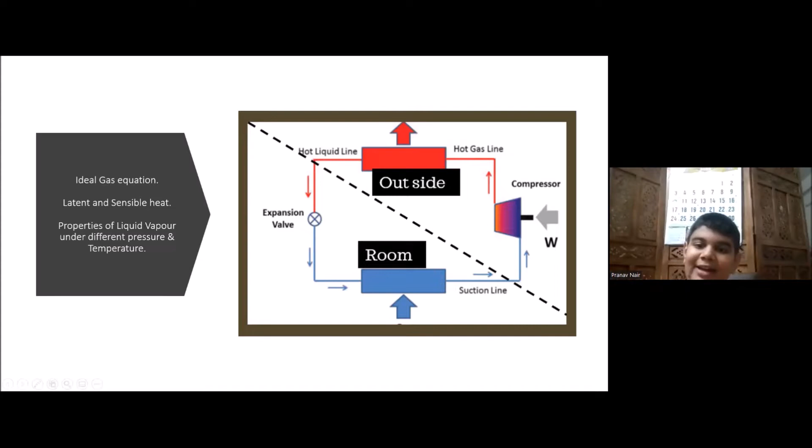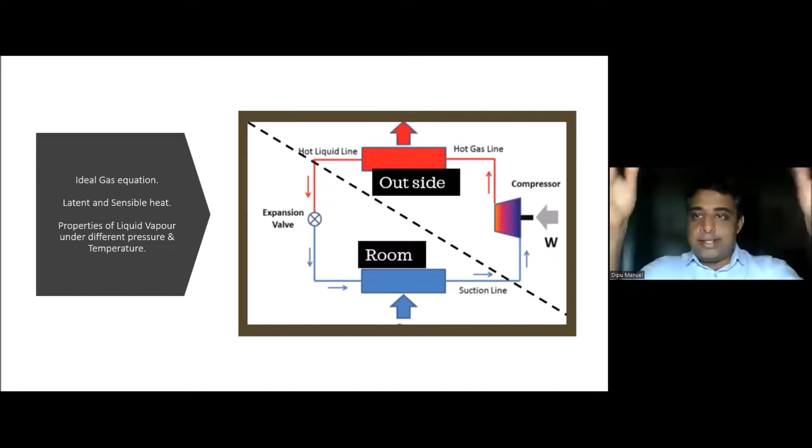That is the basics of air conditioning. So we explained in the last class that it's all about managing the air, managing the properties of air. That includes the humidity, water content, the temperature, and the pressure related to that. That is what we do in air conditioning. So that part is already answered, and we are not getting further into how he developed the air conditioner or the properties of air side.

So that is generally called a psychrometric chart, where the relationship of humidity and temperature of air is shown. That is the basic chart which explains the properties of air at various temperatures and various humidity ranges.

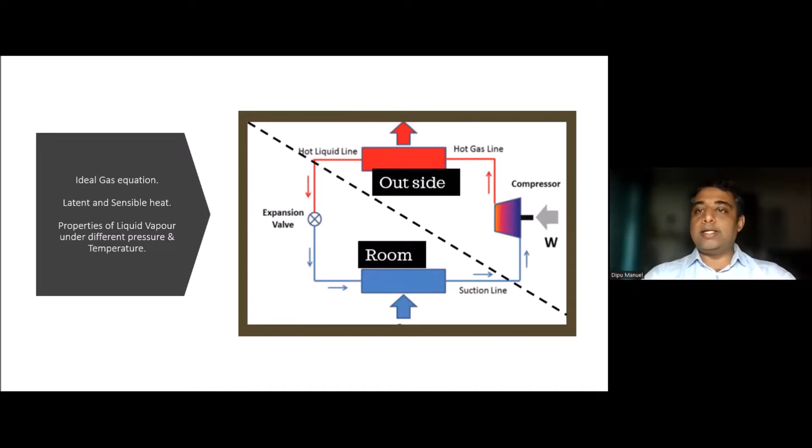So before getting much further, what is the best natural air conditioner? Yes. Sir, I'm not sure, is it fan? No, I'm talking about a natural air conditioner, something occurring naturally, not man made. Wind? Any other guesses, wild guess?

Is it rain? Rain, yeah. If you see Earth as a complete ecosystem, yes, rain is part of managing the temperature in a particular area. That is basically called the water cycle - rain, evaporation from the sea, condensation, that is also there. So that is when you see it in a bigger canvas. Let us bring it within the Earth, not Earth as a whole.

Any guesses? So I'll just come back again.

Air conditioning is about moving or maintaining the properties of air. It is like moving energy from one side to the other to maintain our desired temperature - moving energy from one part to another, one body to another, basically movement of heat energy by various ways.

Is it wind? Yes, wind is part of natural air conditioning. So it is like wind, rain, thunder, lightning - all this comes as a part of it, when you see the complete Earth.

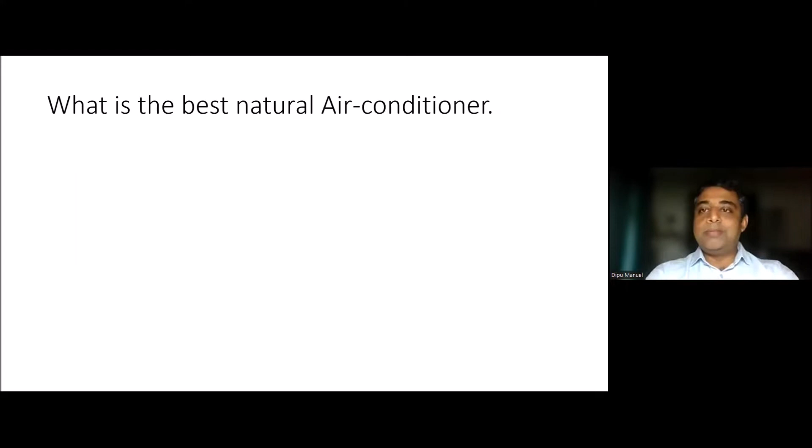Okay, I'll come back. What happens when we feel cold? What happens when we feel warm?

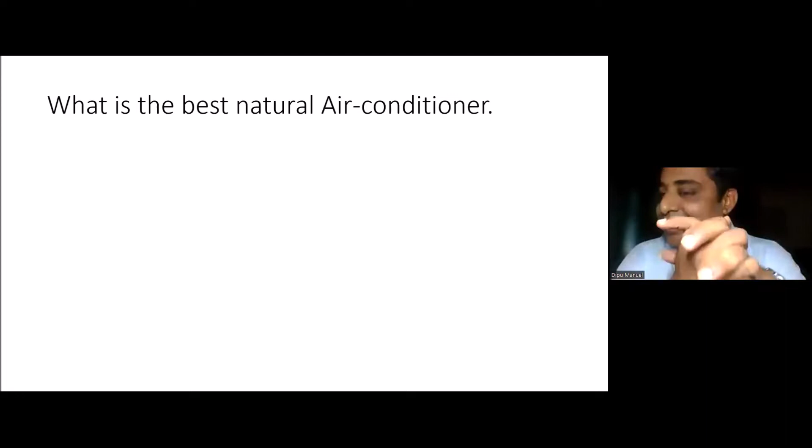Every living organism has a varying body temperature. So the best natural air conditioner is the body - human, or any natural organism. Let us take the example of the human body.

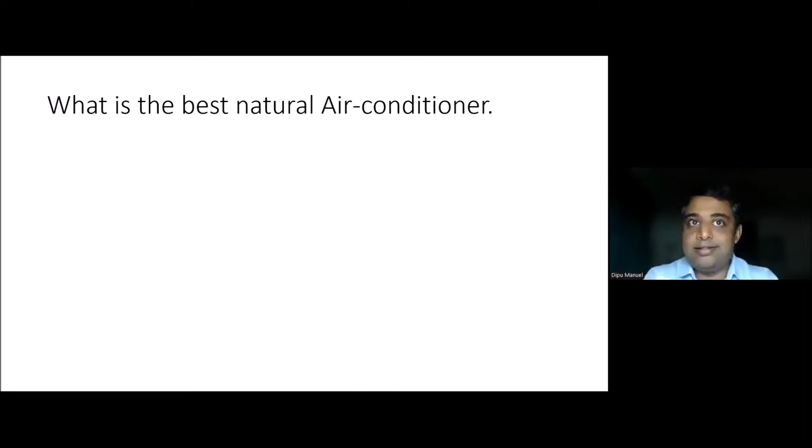When we feel cold, we sit very close. What we are doing is protecting the heat energy generated from our body by reducing our total exposure to the atmosphere, so there is very less space for the heat energy to escape. We cover our body with more clothes.

If you see animals, their fur stands up so there is very less space for the heat energy to escape. When it is summer, we like to move our hands away to let more air move through our body. We sweat.

What happens in sweating? The water comes out through our sweat glands. It uses the temperature on our skin to evaporate. When it evaporates, our body feels cool - that's evaporative cooling.

Last class we discussed about water kept in a pot - that is also called evaporative cooling. When water evaporates, it takes heat energy from the body it is touching. In a mud pot, it touches the pot, so the pot becomes cooler than the ambient condition.

In terms of the human body, it takes heat from our skin, so our skin feels cooler. That is the way we maintain our temperature. So organisms are the best natural air conditioners.

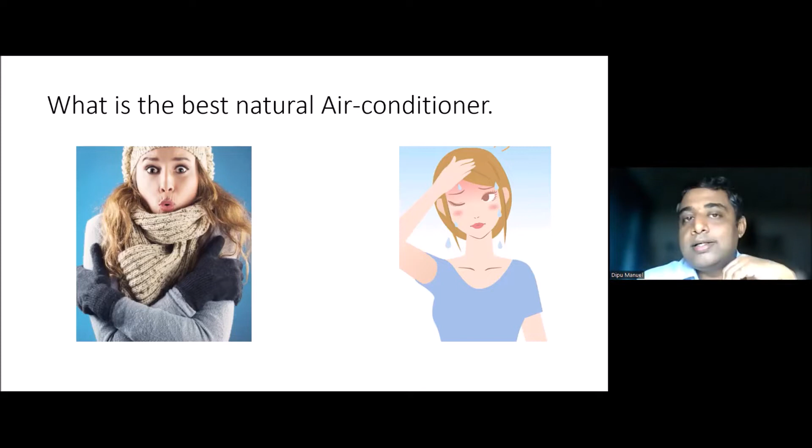Any other thought on this? You can think about anything else. I've seen one video where they told... when you mentioned the mud pot, I remembered terracotta - they use it for air conditioning.

Terracotta, terracotta - like long tubes they make. Yes.

That's all. Until 1902, until Willis H. Carrier's development, humans were using evaporative cooling for air conditioning aspects. So one method is called evaporative cooling.

The second was movement of air. If you look into Persian architecture, or basically in India, the kind of architecture where we have huge towers rising up, like Qutub Minar - this kind of architecture is found in dry climates, which came from Persian architecture, originating somewhere in the Middle East region.

What these towers used to do: the air comes out and creates a tunnel, and the air going out creates less pressure at the top. So more air from the desert comes through the windows, which are small openings. When it passes through with slightly higher pressure than atmospheric pressure, it expands inside the room, so the room feels cooler.

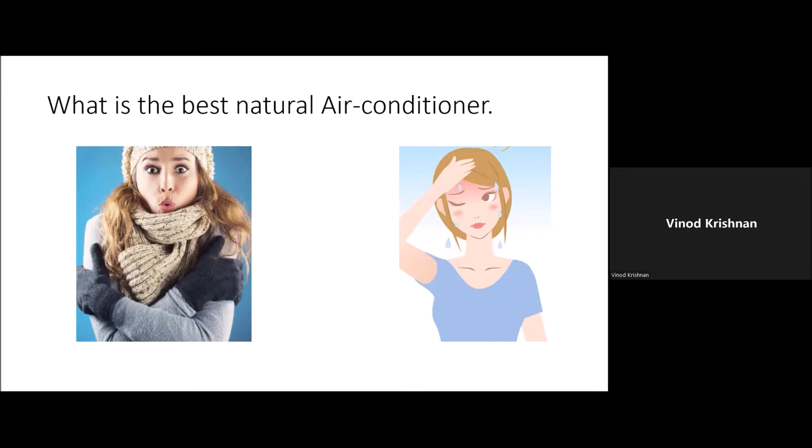No, actually, I'll clarify again. In people like us who are living not in the polar region, normal human beings or animals which are awake for 365 days, our metabolic rate increases in the winter. What I was talking about metabolism going down is only for polar bears or animals which tend to sleep for 6 months, 8 months, the winter they completely sleep away. And in the summer they wake up, because the summer may be -20, winter may be -60, -40 for them. But people who have a plus temperature, living in plus temperature, that means more than 0 degrees Celsius, or summer goes plus more than 20 degrees Celsius...

These kind of people and animals, we eat more in winter, we eat less in summer, we drink more in summer and less in winter. Drink, that is because we are sweating internally. In places like Kerala, actually sweat comes out and you feel drenched. And when humidity is less, like Delhi, people are sweating, but they don't realize it, it gets evaporated very fast.

So metabolism rate for human beings increases in winter. That is one of the reasons we eat more, or we can say our body wants more food. So we feel hungry more, we eat more. That metabolism is used to maintain the body temperature.

I'll tell you one observation. If you visit a zoo in the northern part of India, Delhi or any other places, maybe Rajasthan, Chandigarh, Lucknow, above that region, there is a board which says from November to March, say X kilogram of meat for a tiger, for example, and minus kilogram otherwise. Even for animals, the zookeepers provide more food during winter. And in summer, the food is reduced, but they may be given more water to drink.

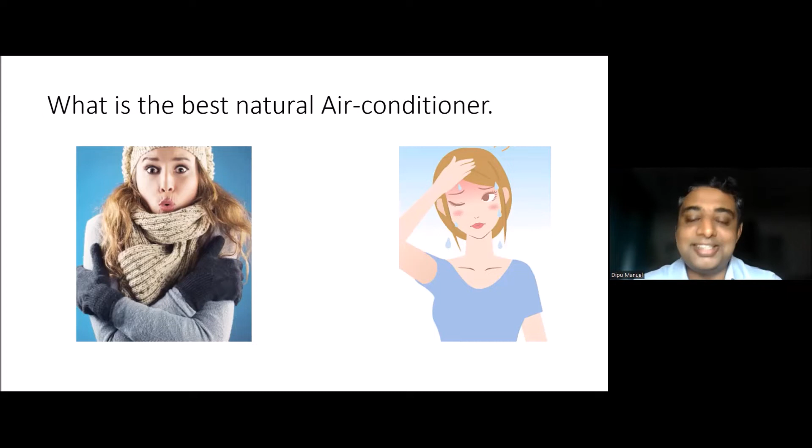Now let's see what are the applications of air conditioning, other than what we normally see. What we understand is air conditioning means movement of energy with external help from one part to another. So what will be the applications of this? Where are they used - types, applications, like in the human body, the naturally occurring air conditioning, and the man-made application or usage of air conditioning. Sir, even in cooling units to keep products at freezing point.

Like frozen meat and all - preservation of food, that will increase the life of a produce. Like an apple, naturally produced by the apple tree - if maintained at normal temperature, it may last a few days. But if you maintain it at a different condition, maybe lower temperature with certain humidity, it can last many more months, so its life can be increased. So apple's life, any naturally produced vegetables, fruits, meat - all this life can be extended, so we can store it when available and use it when required. That is a very good application.

We also use it in condensing milk - that is a way of extending the life of milk, preservation. So from an application point of view, it is preservation of food, or you can say increasing the life of that produce.

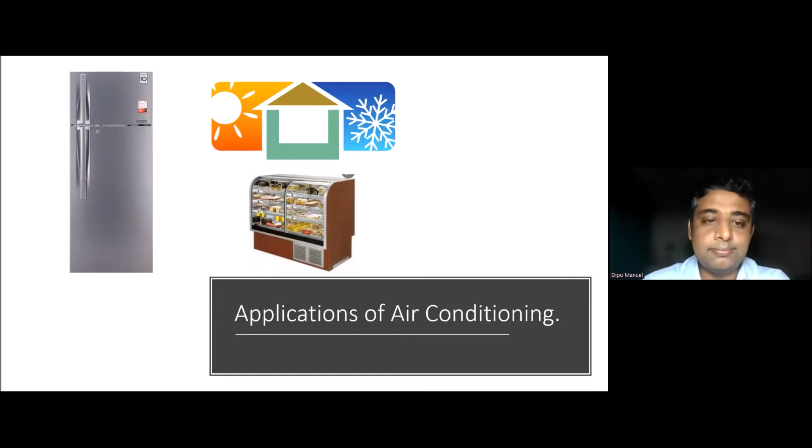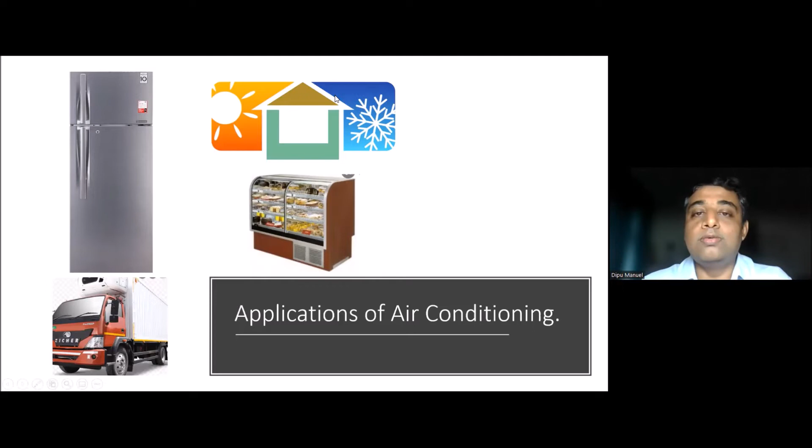The principle remains the same. Let us see the difference between air conditioning in cooling and heating. On the left hand side is what we generally understand as air conditioning, where it cools. We associate refrigerator, ice cream, or low temperature with air conditioning. Let us keep that understanding for the time being.

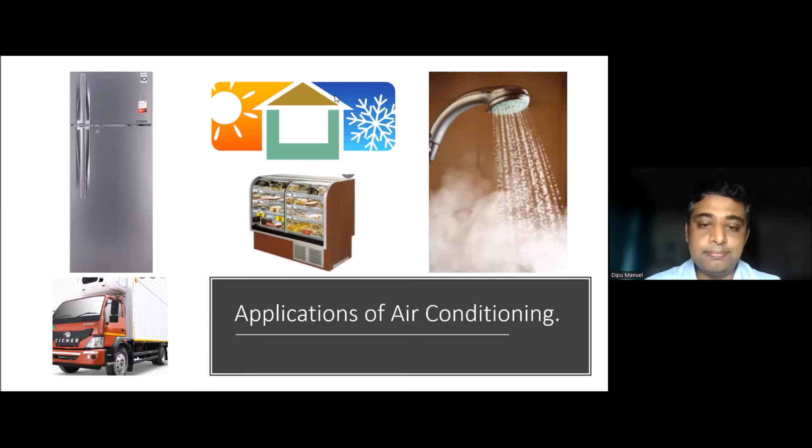So we take heat from an area, reject the heat outside, and use a refrigerant which moves in a closed loop through a motor. It absorbs heat, goes all the way, rejects heat, comes back, and absorbs heat again. If you reverse it, that means if we want to use the heat that is rejected, that becomes a heating application.

Sir, I had seen one video in which they had shown outdoor cooling. Yes, that happens when the inside room is supposed to be heated up.

The refrigeration cycle remains the same. The hot air which is coming from outside, that is what we are taking into the room. So generally the outside and inside get reversed in this case. There is no change in the properties of air or the principles of air conditioning; that remains the same. The usage, whether we are using the cool air or the hot air side, is the only thing that matters. So air conditioning can be used for managing the air.

It can be heating, it can be cooling also. If you further generalize it, air conditioning is managing the temperature of a medium. It can be water, it can be air, it can be any other thing, decreasing the temperature of the water.

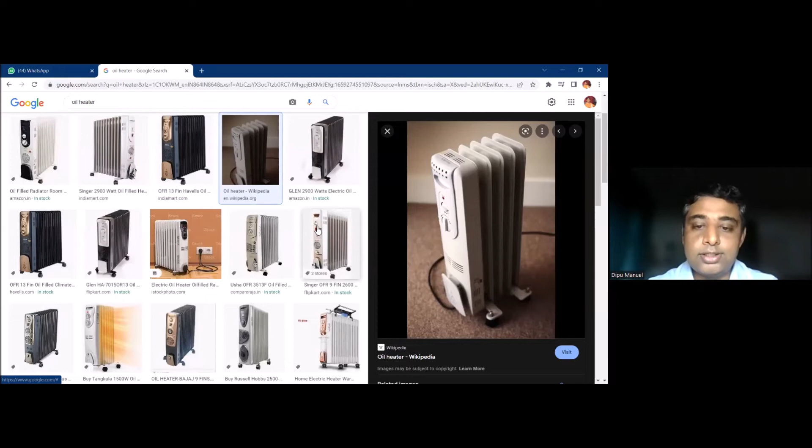So these heaters are generally preferred in rooms. And the third option is air conditioning only, but using the reverse cycle. The condenser and evaporator are interchangeable by way of connecting these pipes through a four-way system. In cooling time, the compressor's hot gas comes here and goes like this, where the room remains cool. In winter season, the gas coming out of the compressor connects to this pipe, passes through here and goes back to the room through this compressor. So this becomes hotter, this becomes cooler. It is called reverse heat pump or reverse cycle in general terms. So the same air conditioning, by moving refrigerant between evaporator and condenser, can be used as a heating application in winter. So generally there are three options normally used for heating applications.

Sir, is there any image of this reverse air conditioning? Like a device that uses reverse air conditioning?

The system looks like air conditioning only. It is the same air conditioner we see in our homes. Only thing, there is no change in looking. The only difference is, in heating, instead of the refrigerant going to this side from the compressor, it goes to this side. So there is a valve which changes the flow of refrigerant, whether it should flow to this side or that side. So it looks the same. Yeah, you can say a four-way valve.

Let me just see the four-way valve. I can explain through images.

Sir, suppose normally the AC will face inside the room. So if we fix the AC outdoor and put a pipe which lets hot air go out inside, then will that do it?

So what happens is, like in cooling, the refrigerant moves in this direction. This is the AC. This is the part of AC which is inside the room, and this is the part which is outside the room. So the refrigerant comes, it absorbs heat from the room, so the room becomes cooler. It comes and the compressor increases the temperature and pressure. It comes out, rejects the heat into the atmosphere, and comes back to absorb more heat. This is the cooling side aspect of it.

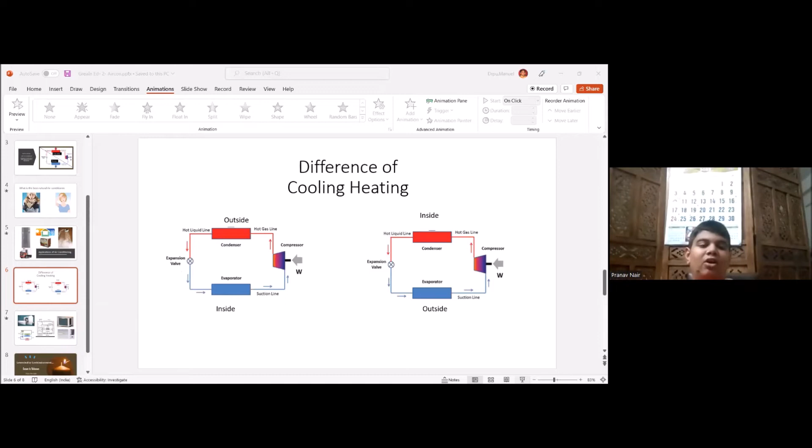In terms of heating, this arrangement turns the other way. This remains here itself because the AC is already installed. The refrigerant rotates in the reverse way. From the compressor, it comes here. Whatever comes out of the compressor is high temperature, high pressure. When it comes into this side, which is inside the room, it rejects that extra heat into the room, so the room becomes hotter. Then it goes back, and when it comes to ambient condition, it tries to absorb heat from the ambient, or become cooler. The refrigerant becomes further cooler here because ambient is cooler at that time. So our outside unit will throw cooler air outside. Then this comes back, so the refrigerant reverses the rotation. So it is called the reverse cycle for heating.

Same air conditioning, same system. Only the flow of refrigerant changes. I hope I made it clear. It will be continuing in either way, and this becomes a heater. And that heat energy we can use for process generation, for hotel applications, hot water for cooking aspects, or hot air.

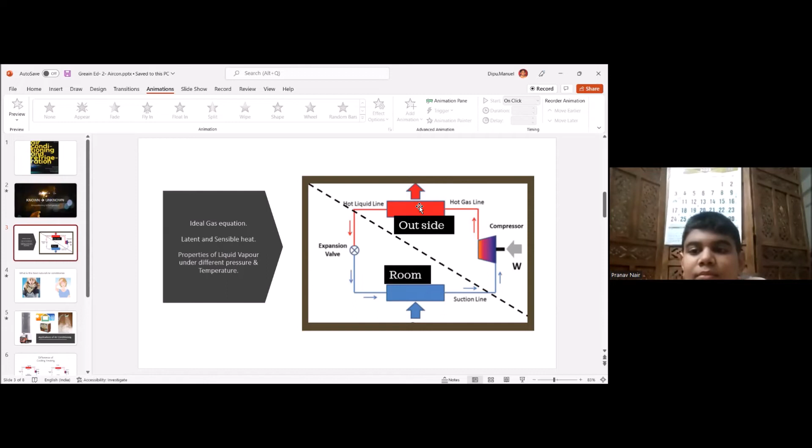Is this kind of heat pump? The reverse cycle air conditioning is called a heat pump. A heat pump is generally 3 times more efficient than direct electric based heating. Like if we use electric heating to heat water from 0 to 100 degrees Celsius, and if we use a compressor based heat pump to heat the same water, it consumes only 1/3 of the energy.

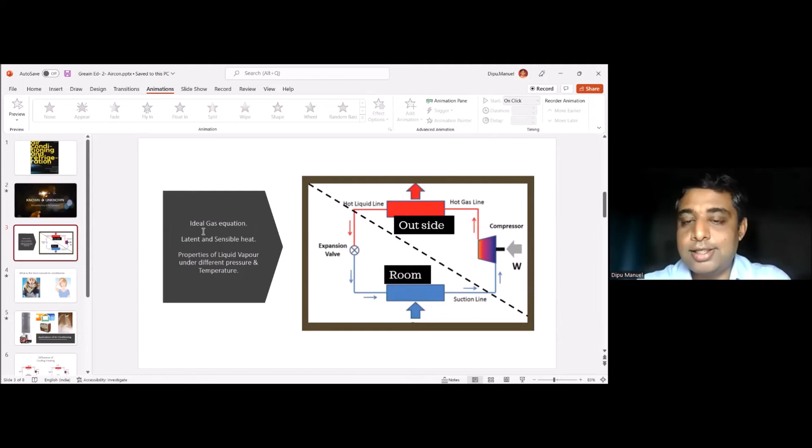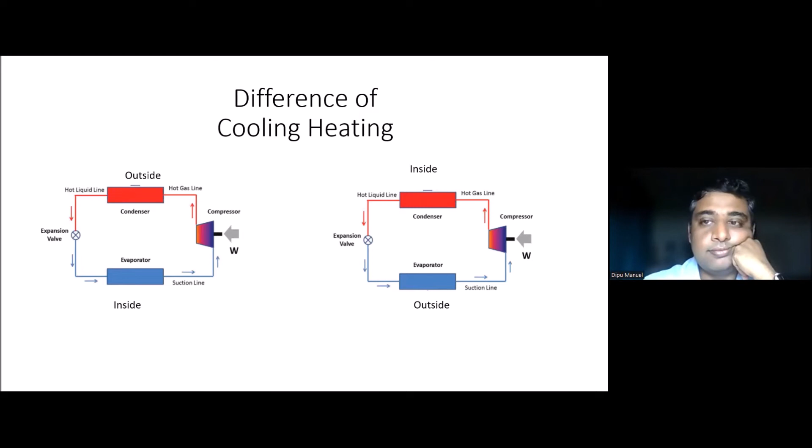So these heat pumps are mainly used in hotel applications because a bigger installation basis is there. Hot water is required mostly in factories where hot water, hot air, all these are required, so heat pumps are used. A boiler, in the normal way, directly burns petrol, diesel, or wood to generate steam from natural resources which are cheap and easily available. But this adds to greenhouse effects and pollution. So if electricity is produced from natural resources like wind or renewable energy, using a heat pump to produce hot water or hot air is much more efficient.

So this is what we call the general understanding of air conditioning. Sadish has already told about the assignment completed on the different types of air conditioning. So I just wonder, what are the different types of air conditioning? Are you asking me? Yes, and others also.

Sir, I actually wrote it on the basis of where it is used. Like in houses, we mainly use wall mounted air conditioners, which are on top. In offices and some international schools, we use centralized air conditioners. And in my school, there is even a ceiling cassette. I also put portable air conditioners, which you can easily shift from one place to another. Then I also mentioned about condensing and cooling tower and centralized air conditioning, that's all I mentioned.

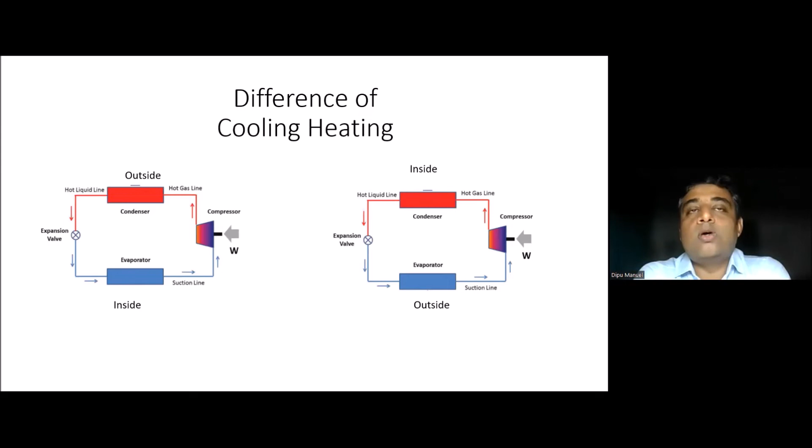So what you have told is correct. It's called window air conditioner, where the complete air conditioning system is enclosed in one box. So in a window air conditioner, this is what we see from outside, this is what we see from inside. The entire air conditioning is in one box. It is called window because it is installed through a window—you create a window in the wall and put the complete system of the air conditioner.

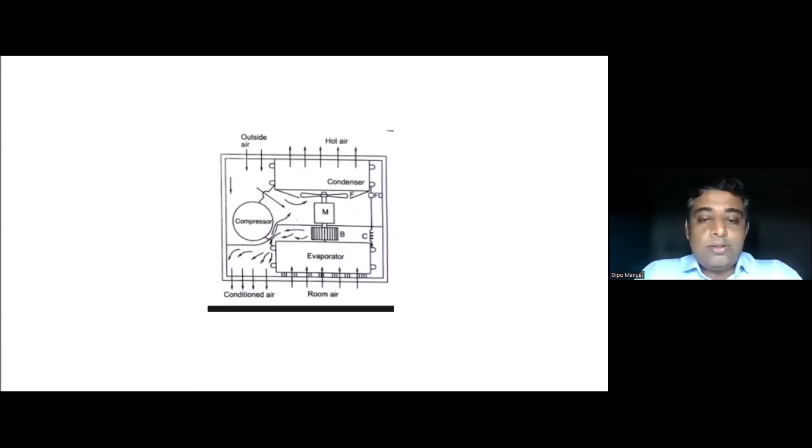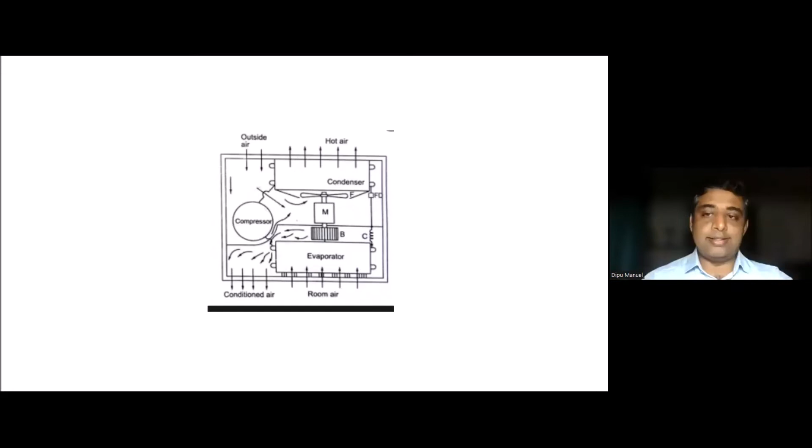You're asking me something? So which is cheaper, window or the split one? See, the window becomes cheaper because the total material used for construction is less. The split is costly because if you see, in the window, one box has the condenser, evaporator, compressor, motor—one motor which runs two fans—everything condensed into one box. So it tends to be cheaper.

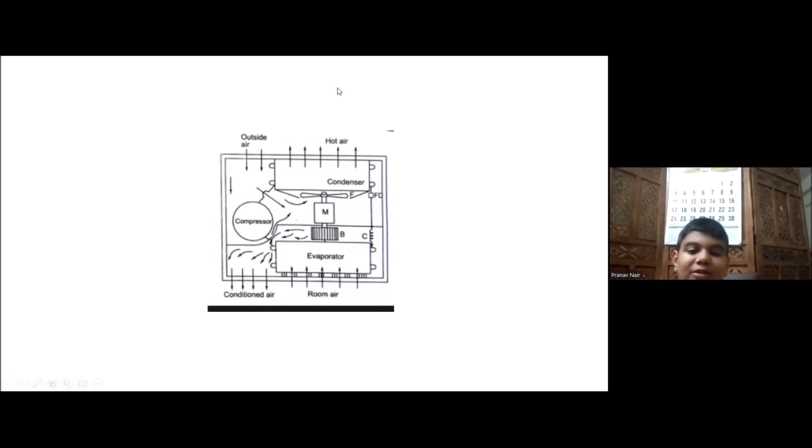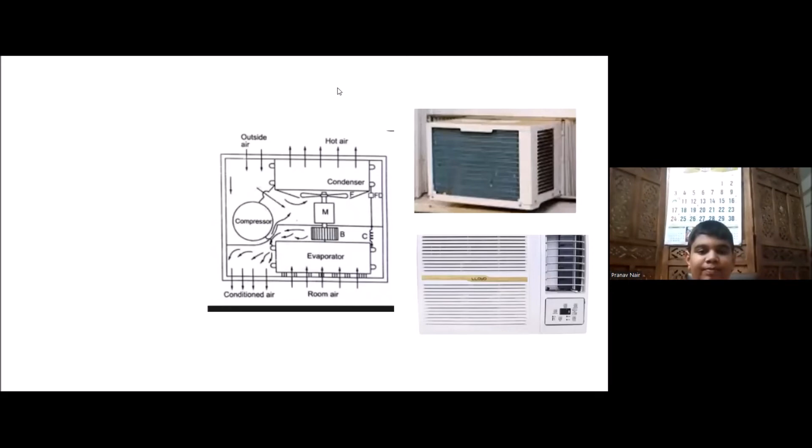When it comes to split, we are splitting it—one motor for the condenser air to move and the compressor in one box, and the evaporator with another motor and another fan for inside the room. So we split the air conditioner into two parts, that's why it's called split air conditioner. But the principle remains the same—the refrigerant moves from evaporator to compressor to condenser and comes back that way.

Then the other one is centralized air conditioning. But before that, about the cassette—the indoor unit shape can be varied, various kinds of shapes we can put. Based on the shapes, we call it cassette, ceiling mounted, wall mounted, ceiling concealed, different names. But the principles of air conditioning remain the same; only the type of indoor unit varies to suit the interior design.

So sir, mainly how many types are there? Mainly, in general, we can say window and split types of air conditioning. And the third option is centralized air conditioning—three ways we can split it in general. Within split, based on the indoor unit, there are different names, but all fall into one category called split air conditioners.

What happens in centralized air conditioning is, for example, let us take a 10-story building. One option is that we can keep every room with either a window AC or a split AC. But if the floor is very big, there are rooms in the center of the building surrounded by other multiple rooms, and it is very difficult for heat energy to reject to atmosphere—it has to travel all the way to the end of the building.

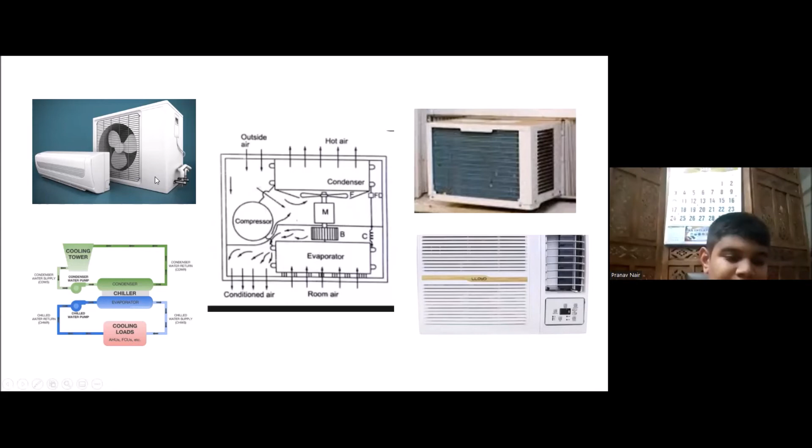Water is a non-compressible liquid. The advantage of it being a liquid, and difficult to change phase in atmospheric conditions, is that we can move water for a long distance without much loss of energy. So water absorbs heat here, and we just circulate it over a longer distance wherever possible to reject it through the cooling tower to atmosphere.

What happens in the cooling tower is called evaporative cooling, the same cooling we've seen in a mud pot. Yes, here the water does get evaporated in the cooling tower, because water is allowed to fall with gravity, from the top it just falls down.

When water falls down, a fan is used to move air through it. When the outside ambient high temperature air moves through the water, some part of it gets evaporated, around 4 to 5%. When water evaporates, it takes heat from the remaining water, so the water that remains becomes cooler than the atmosphere.

That cooler water comes back to the condenser and takes the heat away, this is what happens on the cooling tower side. But isn't water an expensive refrigerant? Water is cheaply available, one of the cheapest liquids available in the world.

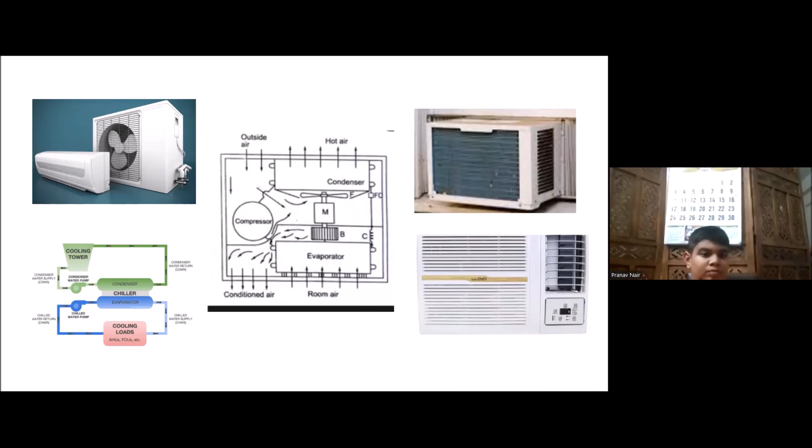There, the water transfers its cool energy into the air, and the air comes out into the room. So centralized air conditioning is called centralized because the refrigerant part is centered in one part of the building, and energy rejection or absorption happens based on our requirement.

All the complexity you're seeing on this screen is just other types of air conditioners, but basically every type of air conditioner can fit into these categories. Within one single unit, called a window air conditioner, you can split into two. There's an option like one condenser with multiple indoor units or multiple evaporators, then the centralized unit, so this becomes the centralized system. These are the various kinds of air conditioning.

Next time when you go out, look around at the places and how the air conditioning works, what kind of air conditioning you see, and try to identify where the heat is rejected and where the cool energy is absorbed. With that, any further questions? There are no further slides. That summarizes generally the usage of air conditioning and its principles.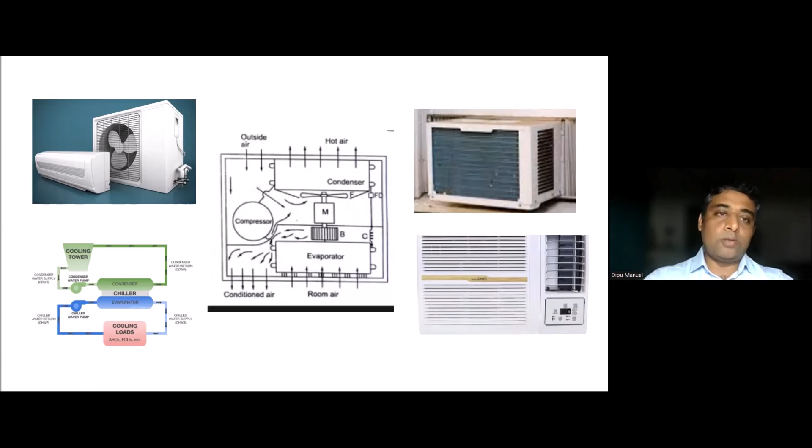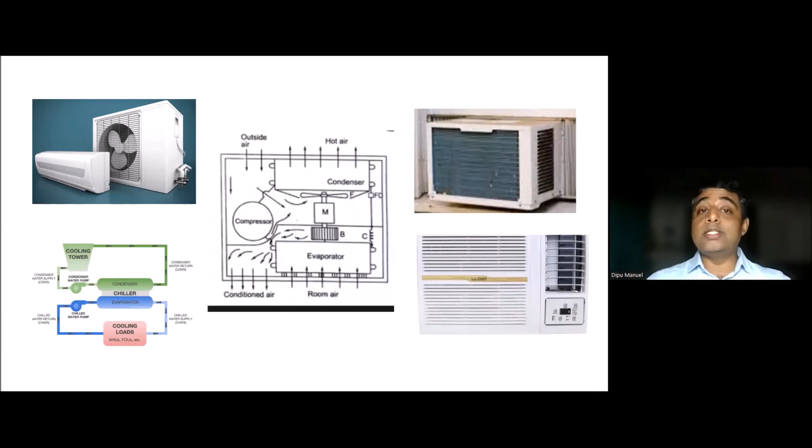So it moves the air by flapping the big ears continuously. And its skin does that too. So through the skin, it's actually not sweating - there is no water that comes out of it, but because of the air movement, it still becomes cooler. It's not fully evaporative cooling like in human bodies. The sweat glands of elephants are a little different.

So different animals evolved in different ways. If you see London's Natural History Museum - you can Google it and see - you can see elephants with big furs, like animals in cold climatic zones. So elephants in the evolutionary cycle used to be in cold climatic zones also. But over a period of time, elephants ceased to exist in cold climatic zones. Whatever elephants we currently see are in hot climates like Africa, India - more in the tropical zones.

So it needs air movement because air becomes stagnant. They move the air through their body by continuously flapping, and the blood vessels in their ears get cooled. So basically the refrigerant in our body is our blood - other than many other activities, our blood acts as a refrigerant. It moves temperature from inside our organs to the skin, the peripheral part of the body, to reject it.

So one of the yoga points - since we are warm-blooded animals, human beings, our exhalation is hot. If you just keep it, that is one other way of the body rejecting heat, because our blood carries oxygen, carbon dioxide, and other things. It comes to the lungs, and the air which we breathe in changes temperature inside the lungs because it absorbs the heat and then rejects it.